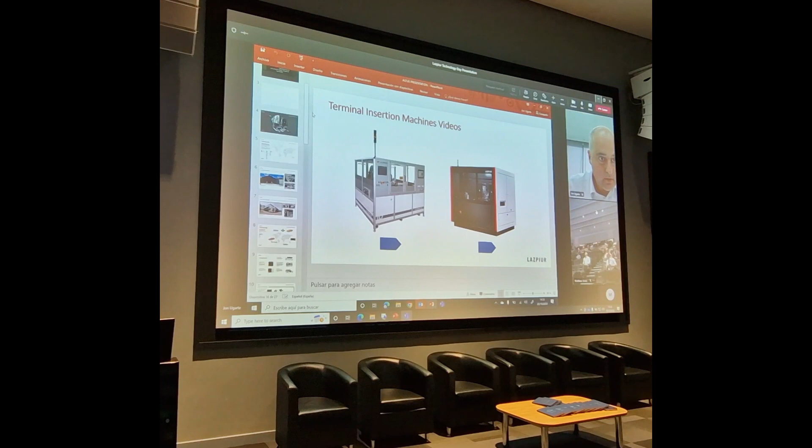Going to the following slide. Sorry. Now, you see? Okay, all good?

Lazpiur operates internationally in two business divisions. We have two main activities: one is the construction of special machinery, machine engineering, and the other is high precision machining.

Most of Lazpiur's activity, about 95%, is related to the automotive industry, and we are delivering solutions to some of the most relevant companies all around the world.

We have 170 employees, and the turnover we achieved last year was 22 million euros.

As we have two activities, 50% of the turnover comes from the mechanics or machining activity, and the other from construction of machinery. We think it's very important to keep both main activities in our industrial division, because the mechanics activity gives us the cash flow needed to invest in the elements and machines required.

Right now we operate worldwide. We have sales agents in the US, Mexico, Italy, France, Brazil, India, and UK.

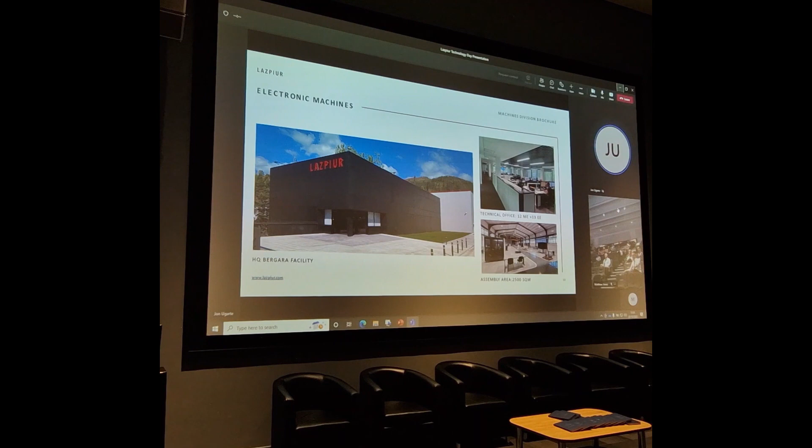We think support is very important. It's easy to sell the first machine without any support, but it's very difficult to sell the second machine if you are not giving support.

So to give support worldwide, we have different distributors and sales or service agents. We cover North America and Mexico with SMT America, Brazil with Altrade, France with Axon, and UK and Eastern Europe with Altus together with SMT Europe. In India we have Mentronics, and in China we operate directly from our Tianjin facility.

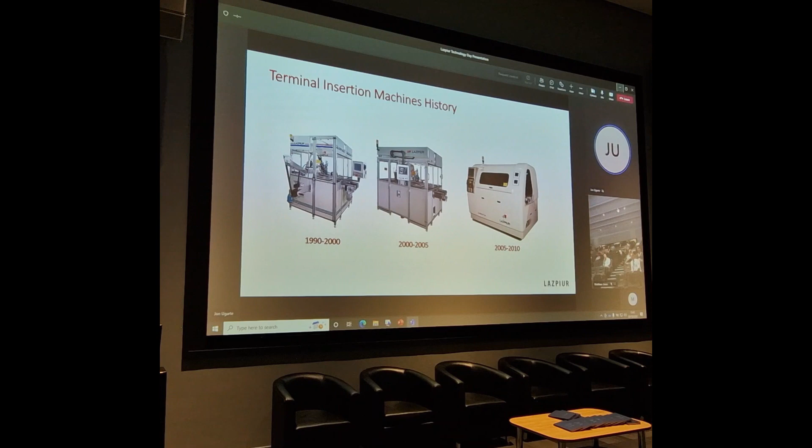We consider ourselves experts in the insertion process because the first machine was developed about 30 years ago. We started manufacturing machines in 1990, but at that time all the movement was activated by pneumatic cylinders and so on. We've been delivering and developing different machines as the market requested, and right now we have up to 6 insertion machine models worldwide.

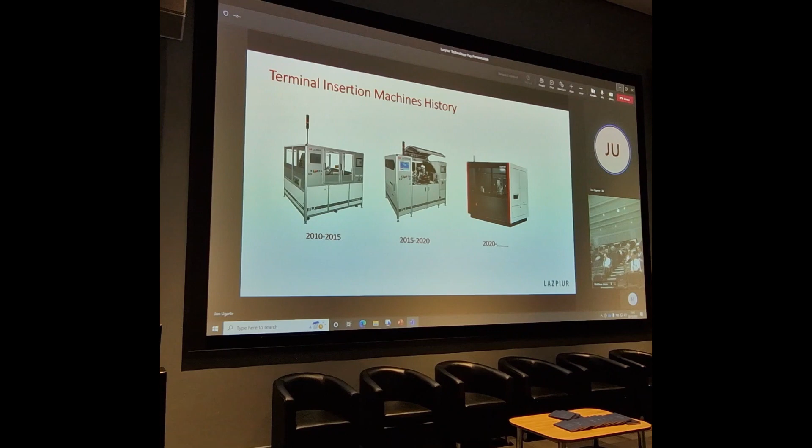So this is how the terminal insertion machine line configuration looks like. We could have a different machine just to insert the terminal on the top side of the PCB, we could have a flip station, and also another machine just to insert the terminals on the bottom side of the PCB.

I think the best way is just to show you a video of the couple of machines that we have already now. I will be on mute because I think the video will have a 5 or 6 second delay, okay?

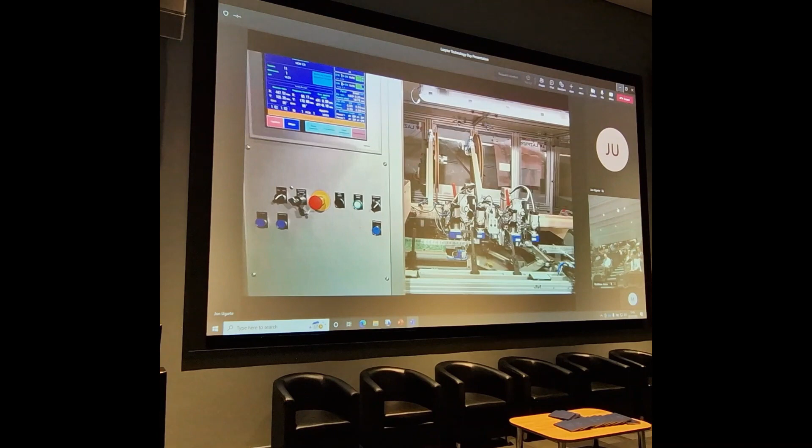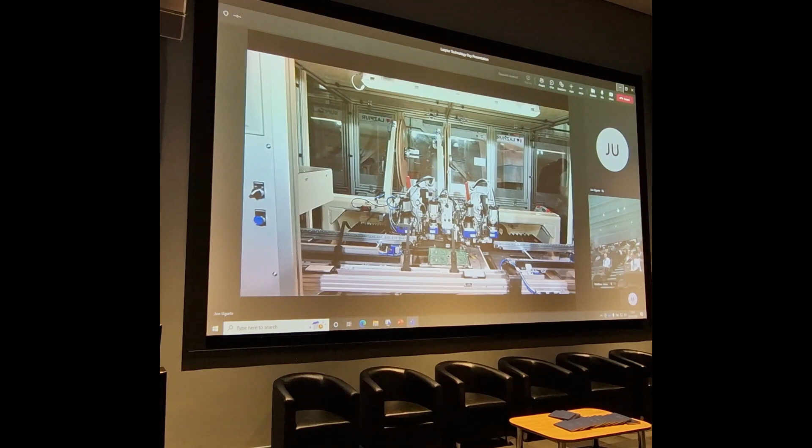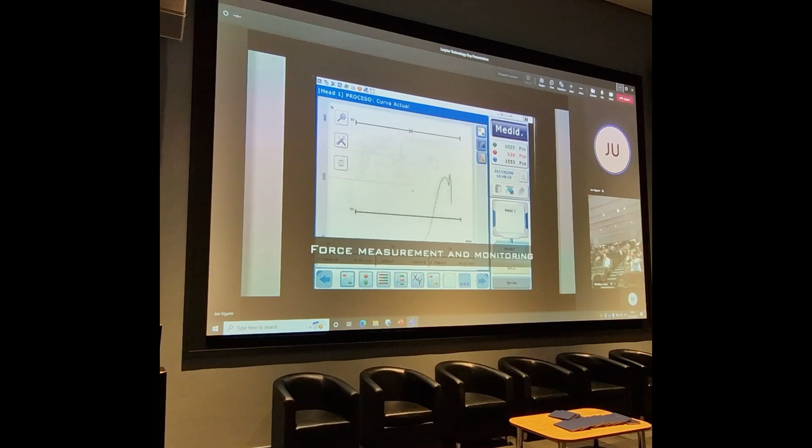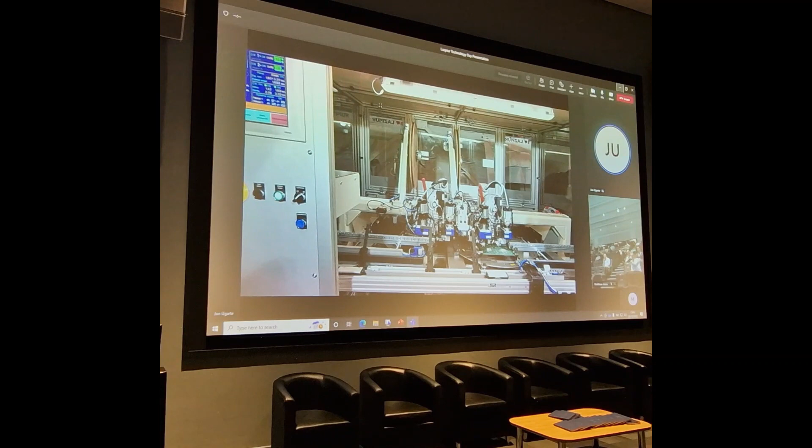So mainly, we have a PCB, the PCB will be coming from the inlet conveyor. We are measuring the force, and we are able to insert 1x1, 2x2 in this kind of model. We have a vision system, and the vision system is checking if the PCB is placed in the correct position or not, and if it's not, we are doing auto correction of the x, y coordinates.

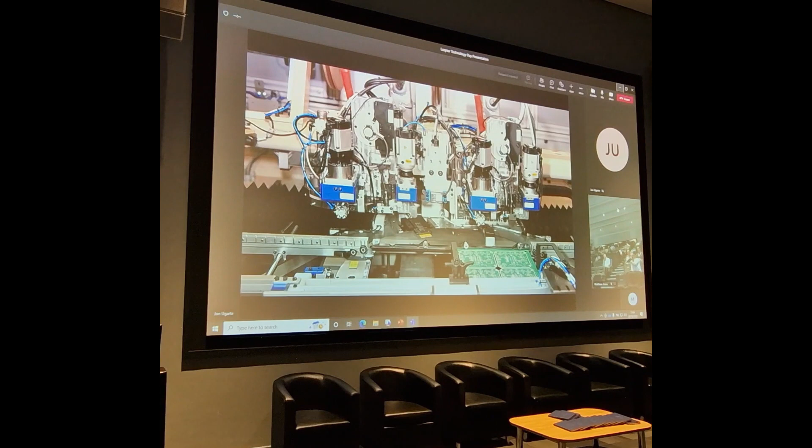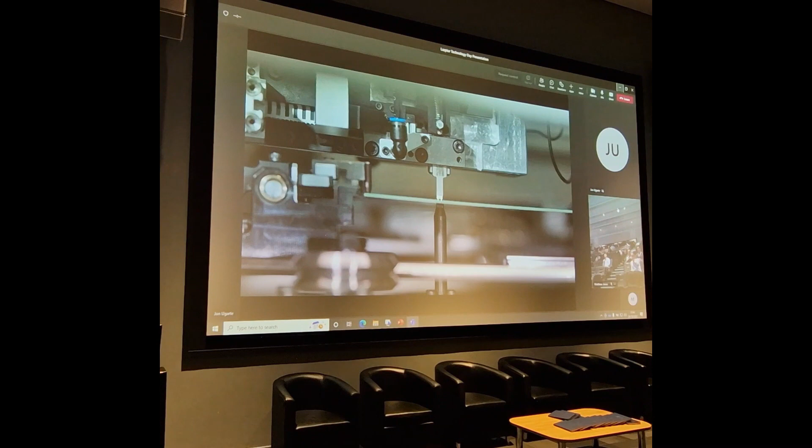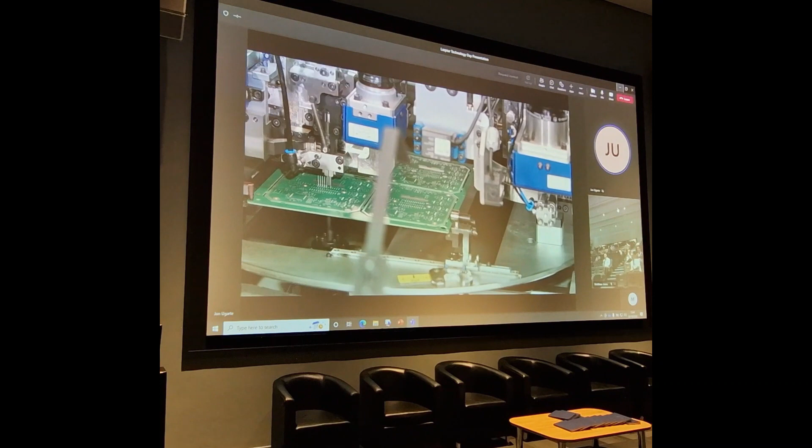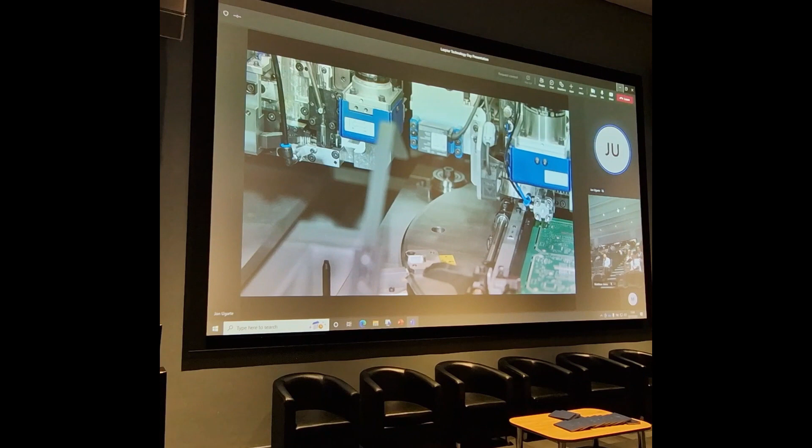Slow motion is how we support the PCB while doing the insertion. In that case, we also measure the length of the component that has passed through the PCB. The machine uses a vision system, so we're able to use a rework mode as well.

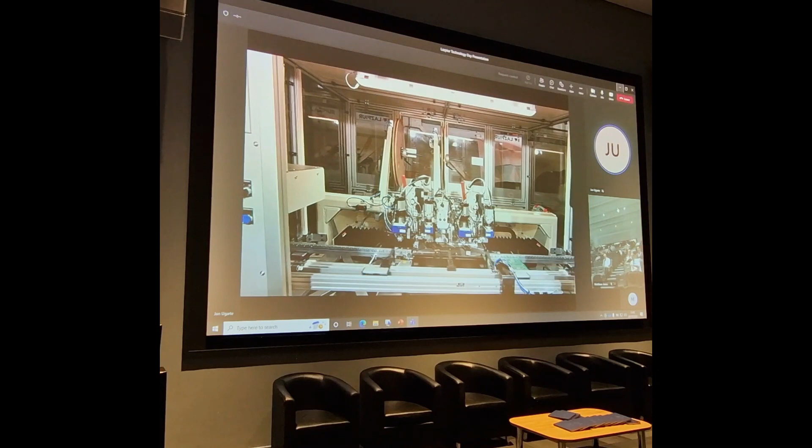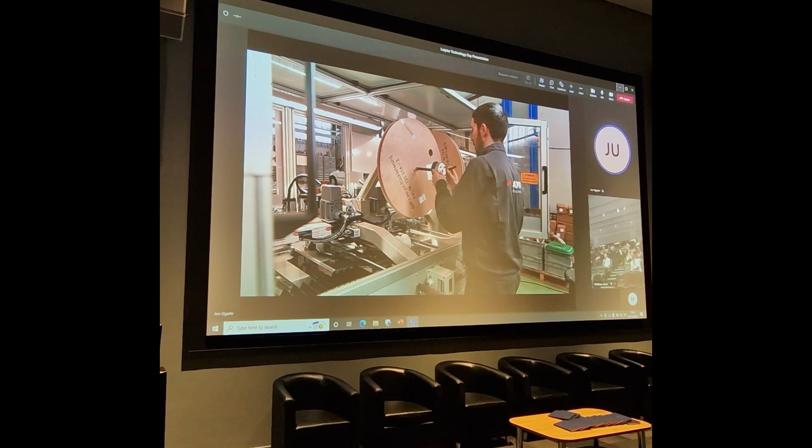The camera checks if the hole is empty, and in case it is, we're able to insert another terminal on it. We provide the machine with emergency spare part kits, so that the customer is able to repair the machine themselves. The way of changing the reel has been designed to be ergonomic, and the machine is able to run with different terminal suppliers.

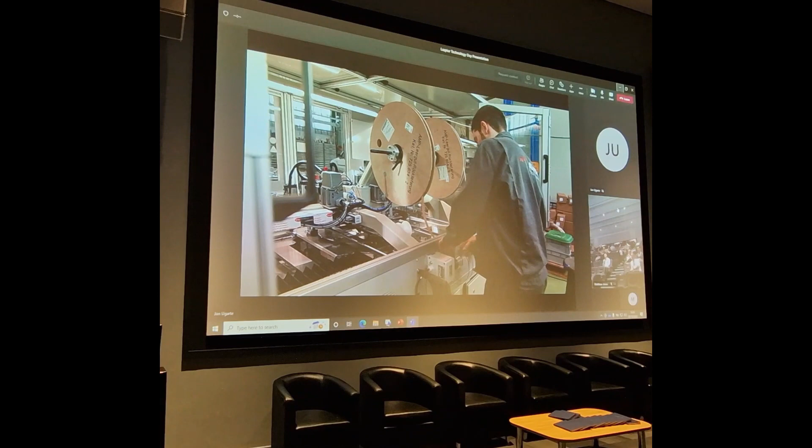We are scanning traceability, everything is customized with our customer's needs.

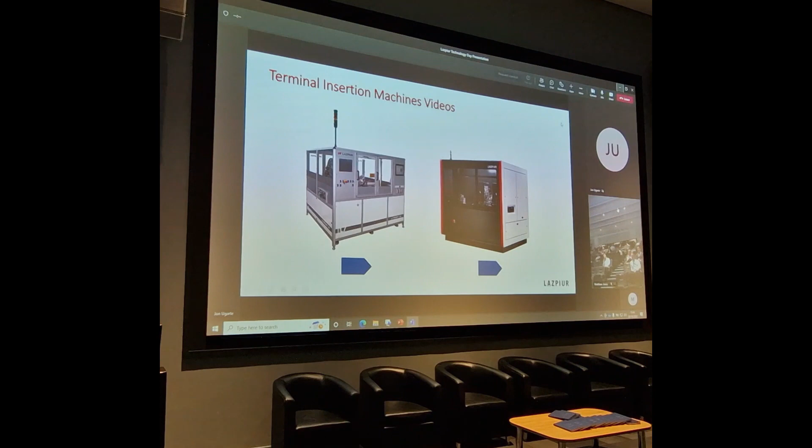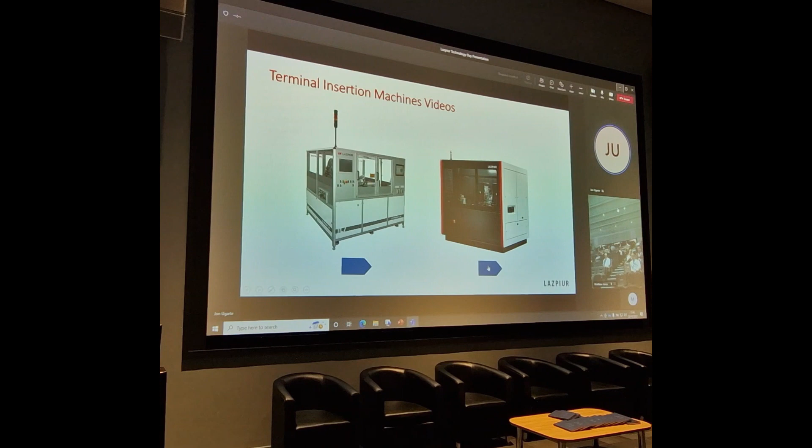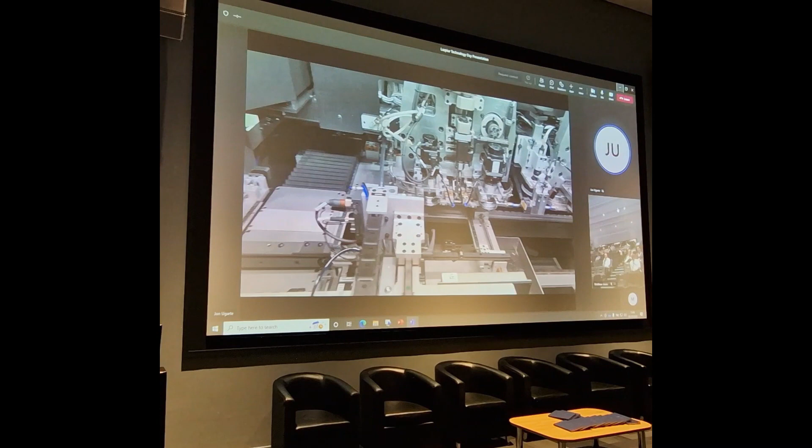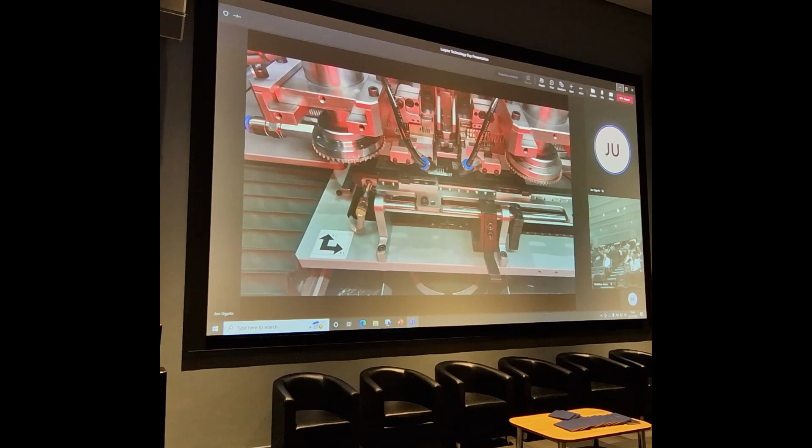That is the first model, the one with more years in press-fit application. Two years ago we developed a new machine that, in short, is much faster and smaller, with the capability of having up to 4 different insertion heads in the same machine. So in that case, we don't need to turn the PCB, because we're turning the insertion tip while doing the insertion stroke.

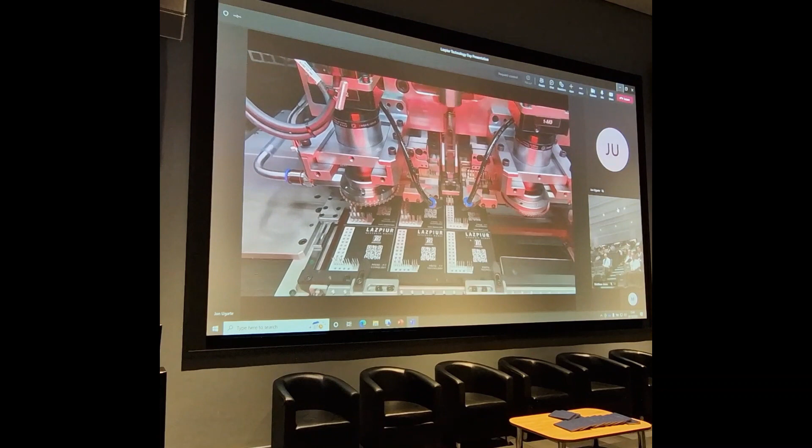It's around 40% faster than the previous one, and in that case we're able to insert up to 3 different terminals at the same time. I have some pictures of this machine, so later on I'll go detail by detail.

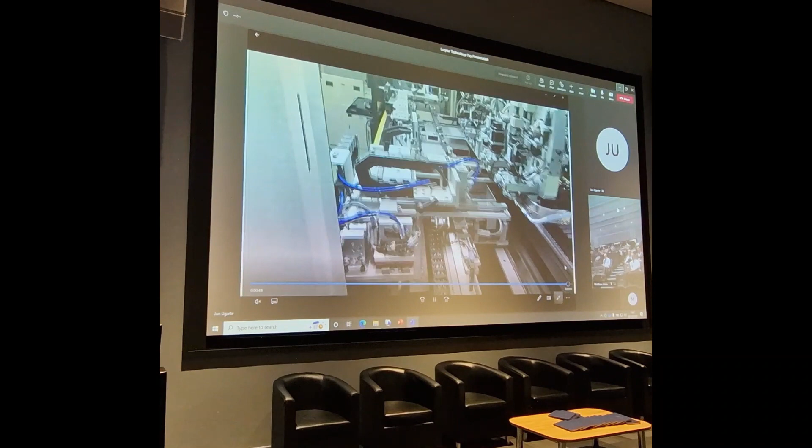The main feature of H model terminal insertion machine is fully automated SMEMA interface, as usual, ESD compliance. We also have the possibility of measuring the force with a force monitoring system, distance and stroke.

We're able to check insertion depth control, meaning we check the distance of the terminal that has passed through the PCB. The maximum PCB size as standard is 350 by 350.

Using the vision system, we're able to compensate and correct the insertion coordinates, and also do automatic PCB orientation check.

Everything as standard includes traceability on PCB and components level.

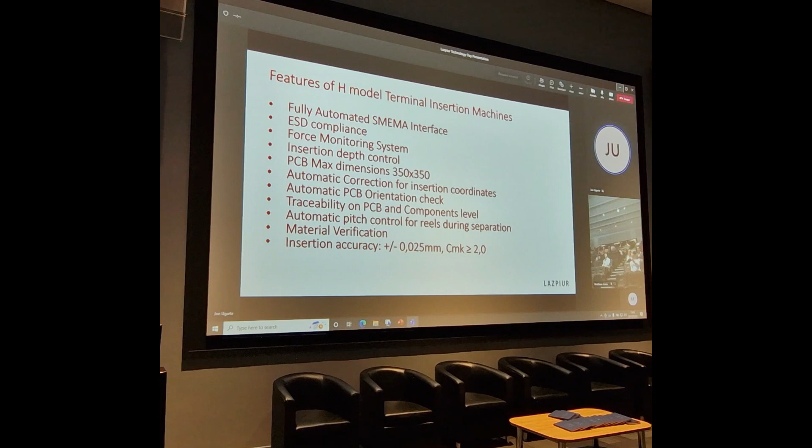We're able to do automatic pitch control for reels during separation, meaning we have cameras to check how the terminals are coming before being cut. We also have a camera to check if the terminal has been cut symmetrically or not. In case the terminal has been cut asymmetrically, we have automatic pitch control of the feeding servo motor. Material verification and insertion accuracy is plus or minus 0.025 millimeters, with a CMK of over 2.0.

Contamination-free PCB insertion. We're also able to check the PCB thickness, so we can adjust the set stroke once we know the PCB thickness measurement.

Some features this machine could have: up to two double insertion heads, meaning we're able to insert 4 different pins or terminals.

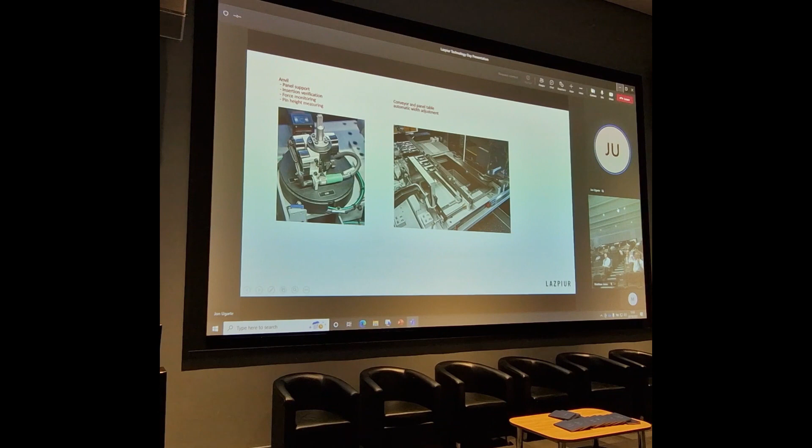Automatic width adjustment, even the inlet conveyor, outlet conveyor, and also the table. Vision system just for checking the PCB location.

This is a panel of PCB thickness measurement, and the different cameras already mentioned. This camera will be in charge of checking the component dimension, and the one in the middle will check the component once it's been cut, and take a picture before it's inserted.

This is reel traceability. We have the possibility of having matrix readers from the bottom side and also from the top side, and also a hand scanner for material verification and chain tooling.

Ergonomic accessibility, and also the reel inspection system has also been designed with ergonomic channels, plus emergency spare part kits.

The other product I'd like to show you, and I have a video, is a fuse assembly line and relays. I'll show you the video because you can see the features of the line.

Main characteristic of the line: we have delivered more than 20 assembly fuse assembly lines all around the world.

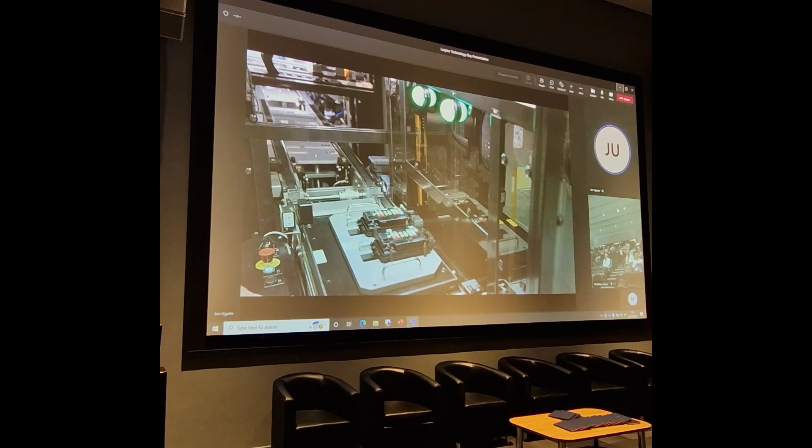We are also checking the color just before getting started or placing it into the junction box. Finally, in this case, we have an AOI or vision system station, where we check that all the fuses have been placed correctly into position. In that case, the unloading operation was done manually by the operator.

And we have a returning system, where the pallet will go to the returning area or to the loading area, from the back side of the line.

The last machine or last line I would like to show you - as I told you before, we are experts in the insertion process, but right now we are also gaining expertise in the bending process.

The video I'm going to show you is from the PL7 platform. The final customer is BMW, and it's just to insert some terminals into the plastic housing.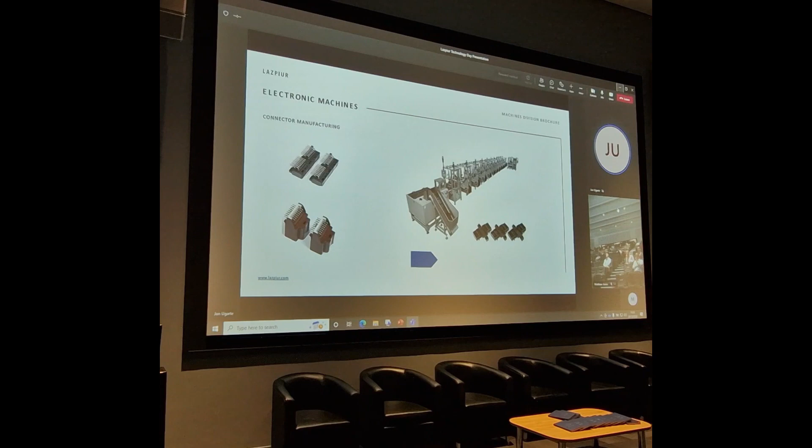So we will have a line composed of different insertion machines, and each insertion machine will be able to insert different terminals into the plastic housing. In the final area we will have a testing station plus a packaging station, where the packaging could be done in tubes, trays, whatever the customer wants.

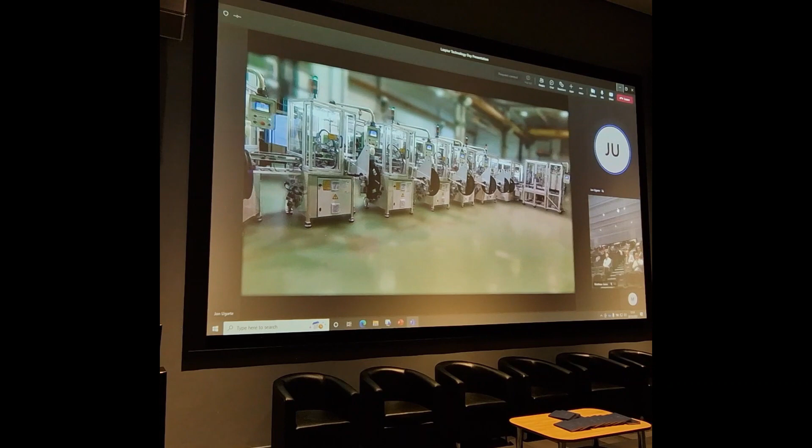We define this line as modular, because depending on the output of the product, we could add or take out machines easily, since each machine has its own conveyor - inlet conveyor and returning conveyor.

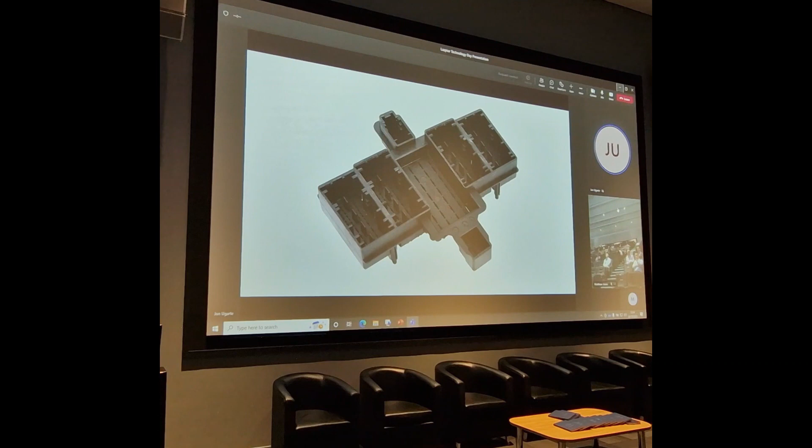This is the piece, naked piece, without any component. Typically we used to fit them into the connector using bowl feeder.

Later on we have a conveyor, where the plastic housing will be transferred, and it will go machine per machine.

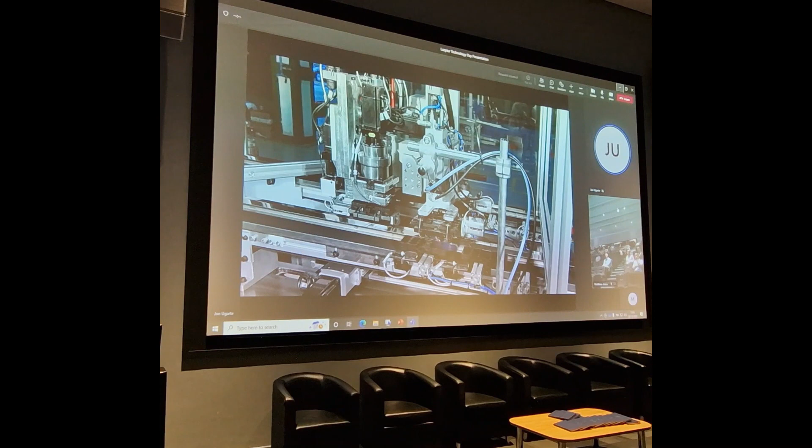Each machine has one vision system which is checking the cavity and the injection molding. Depending on the injection molding and the cavity, the machine will automatically change the insertion product.

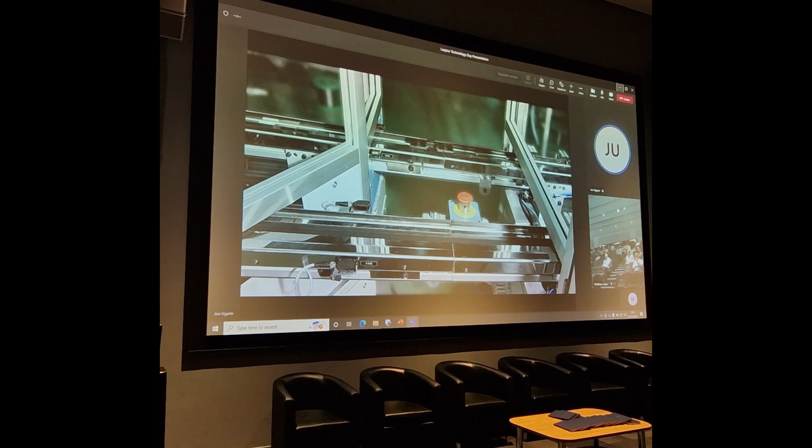You see that the terminals are coming in straight, and we have one insertion head that is able to insert 0.64 millimeter terminals. Another one will be able to insert 2.8 or whatever the customer needs.

So we'll go a little bit faster to the final area, and to the control station. In this control station we have a rotary table.

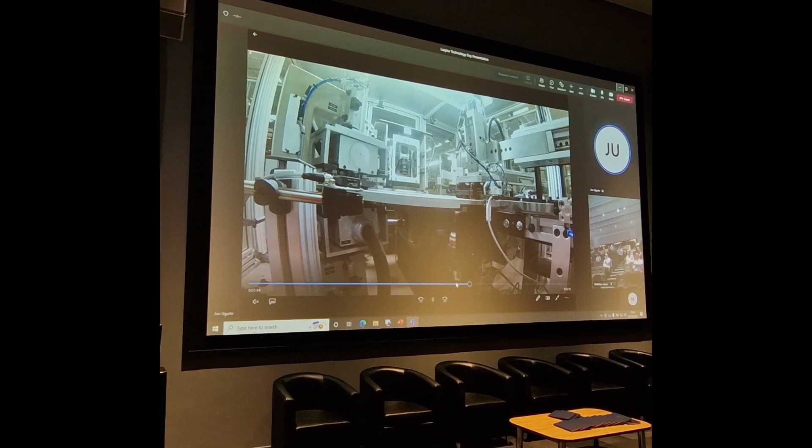The first operation is just to clean - we are doing a brushing and vacuum system from the bottom side of the connectors. Then we do an electrical test station. In some cases hipot is needed, but in that case it was not.

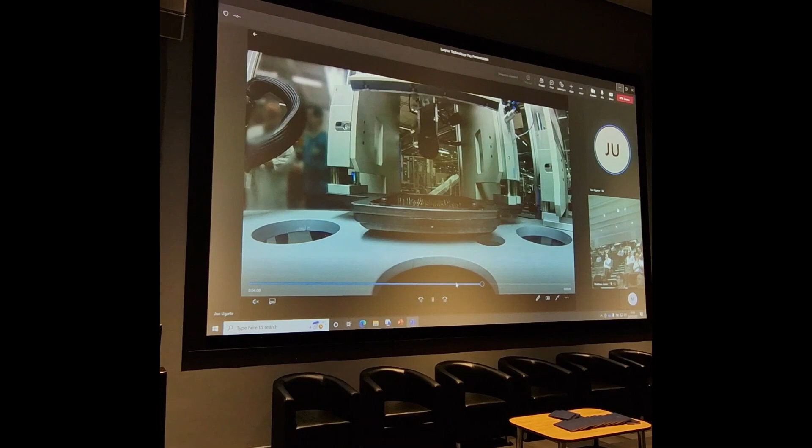Later on we have a pin height and test station by vision, checking from the top side and the bottom side, for pins and elements.

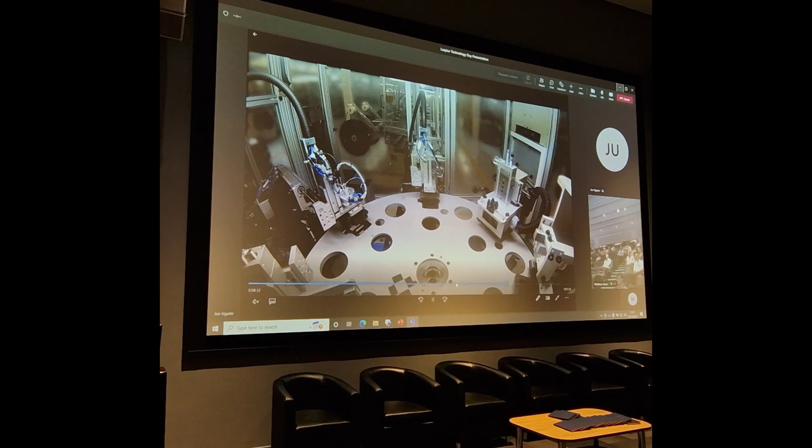And finally we are packaging, nothing else - automatic packaging in trays in that case.